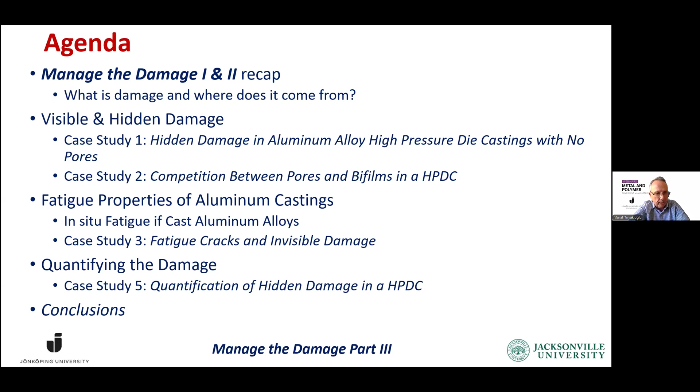There'll be two case studies in which we're going to show you results from our latest experiments. We'll talk about fatigue properties of aluminum castings. There will be a third case study, and then we're going to talk about quantifying the damage, which will be the fourth case study. Then we're going to finally wrap up with conclusions.

Quality assurance of castings traditionally has relied on detection of pores. The size and location of pores are usually specified in quality assurance specifications, for example on an X-ray, so that the inspectors can make accept-reject decisions. This is especially true in aerospace. The thinking is: if there are no pores, there are no problems with the casting. The casting is good, it's sound, there are no visible defects—and that's correct.

But unfortunately, the results of this have created a mindset, even an obsession with pores, that has taken us to adopt some technologies with, in my opinion, very low return on investment. I see that in the recent trend in the acquisition of expensive micro CT scanners. There was a time when we looked into hot isostatic pressing, and that has not paid off well. There's also, in my opinion, a wrong turn that has been taken by industry toward highly turbulent degassing and cleaning. There's a question mark right next to the cleaning technique that I see in the foundries I visit.

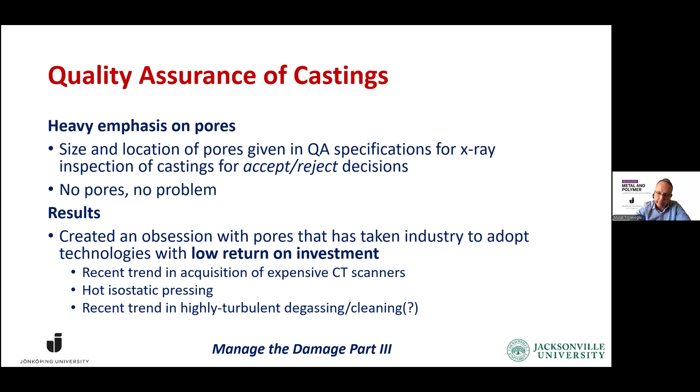We're going to focus on the damage in castings. So we're not talking now about quality, but the opposite of quality—where the damage comes from.

I took this picture where I live, on Jacksonville Beach, during one of my daily walks. It's a beautiful beach, you should come and visit if you haven't done so. What we see here is a substance we are all familiar with—water. We interact with this substance many, many times during the day: we drink it, we wash our hands, we wash our face, we take a shower, we cook with it. So in the end, we know how to deal with water.

And one thing that's important to remember about water is that the surface of water is covered with water.

The surface of liquid aluminum, on the other hand, is not covered by liquid aluminum. It's covered by a solid ceramic. And as long as this solid ceramic remains on the surface, it's harmless. But because we disrupt the surface so many times, that surface ceramic is incorporated or entrained into the bulk of the liquid, creating a non-bonded surface that we call a bifilm, because there are two films on each side. And that is the start of the damage.

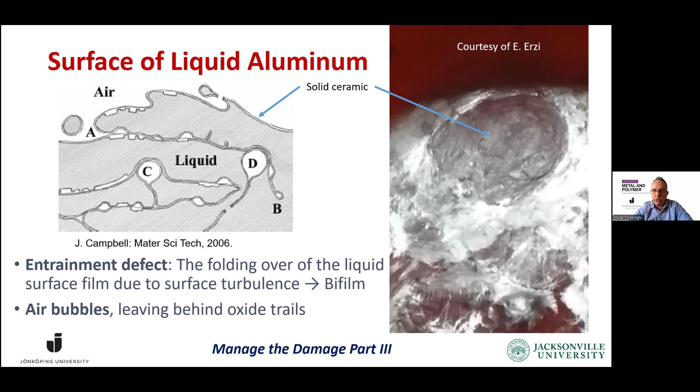So that is the root cause of the damage that comes back to haunt us eventually in our aluminum castings' performance.

When we don't like the temperature of our water, what we do is we put ice in it. There's no problem with it because the surface of ice is still covered with water. But if we put ingots in liquid aluminum, we again create damage, and the surface of the ingot is also covered by a thick alpha oxide. So we keep on giving damage to the liquid aluminum as we disrupt the surface. And that all comes from the fact that we treat liquid aluminum as if it were water.

So the result is bifilms in aluminum castings, and as you can see, several examples from the literature. It can be quite a huge bifilm like this, and you can see one half of the film on this shiny surface, while the other half was removed during grinding and polishing. Here's an extensive bifilm, and if you zoom in, you can see that this is an unbonded surface. It's basically a crack that is in our casting.

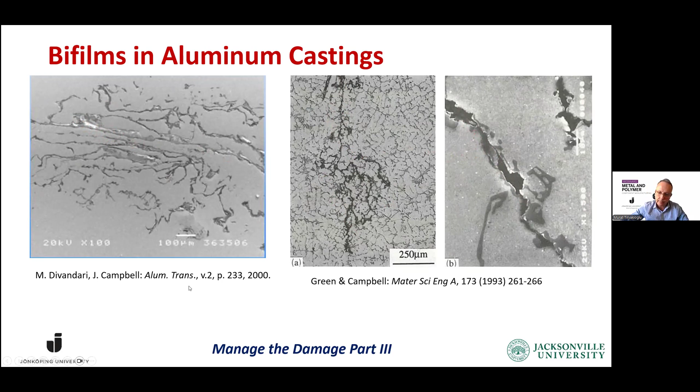So what is the current technology? This is a YouTube video that I found online, and I'm going to show you a small snippet of it.

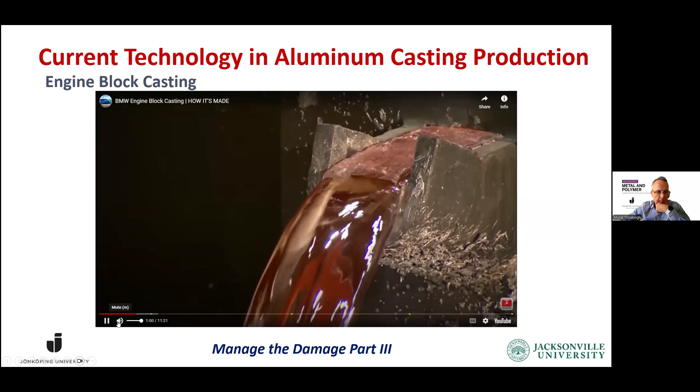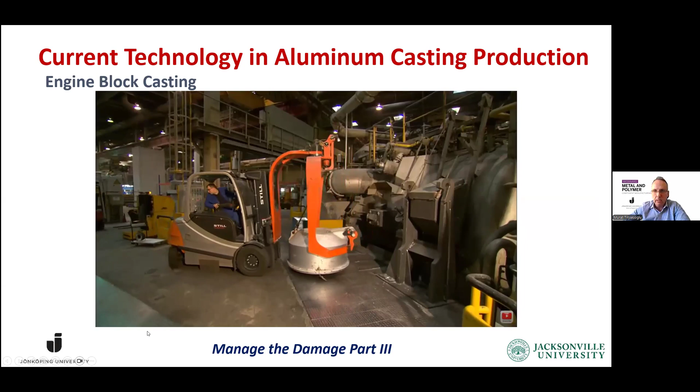So we have a central furnace. And when the metal is ready, that metal has to be transported from the central furnace to the other furnace where the castings are produced. For that, we need a ladle, a transport ladle, and that's taken away by this forklift. So there has been one melt transfer, and now it's brought to the holding furnace, and it's dropped from a height of, looks like several meters. Please notice the area, the top of the liquid metal.

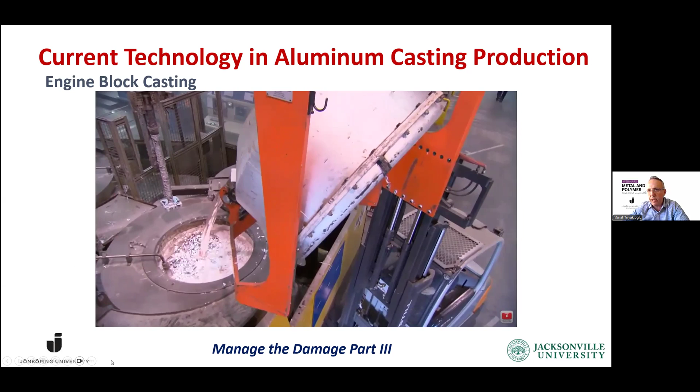As you see, it's quite turbulent, and a lot of air has been entrained, a lot of surface covered by an oxide. So this is a perfect way to damage melts. And this all comes from our design of the production system. If we have a central furnace that requires not one, but two melt transfers, so every time we do a melt transfer, we seriously damage our metal.

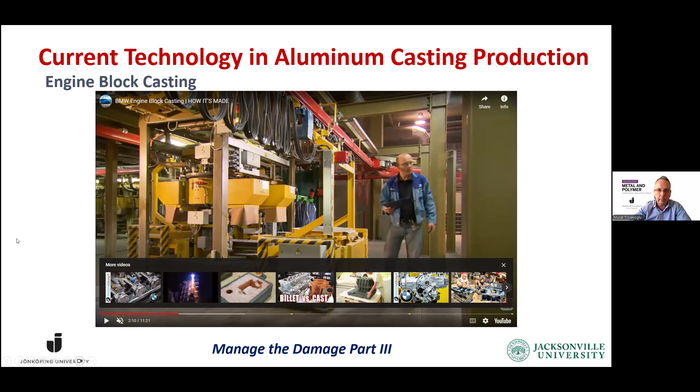So what we saw here in this video, we use buckets. We use buckets in our aluminum production system. We love it so much that we pour from one bucket to the other. And again, in our mind, there's nothing wrong with it. It's liquid, it's just like water, but it's not water. And that mindset has to change.

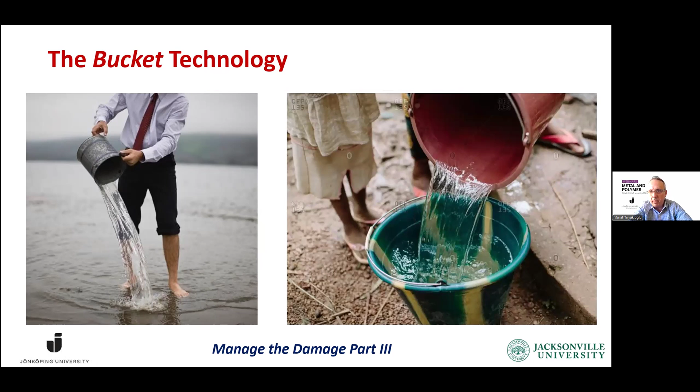We saw how this melt transfer, when it went in, there was a turbulent reaction in the ladle, in the crucible, below in the holding furnace. And that's called a plunging jet. When you drop a jet from a height, it goes into another liquid. It's known as a plunging jet.

It's a great way to entrain air into the liquid. It's well known as a fantastic technique to create a liquid and air mixture. Well, we don't want air in our aluminum castings and liquid aluminum, because that air is going to leave a trail, and in this case, it's going to be a bubble trail. I'm going to show you a picture of that.

But when we have this melt transfer, you can see that in the beginning, there's 65% air in where the liquid is supposed to be, and that gradually decreases, but we are giving serious damage to the liquid aluminum in these melt transfers. And the bubbles and the air that's entrained has buoyancy.

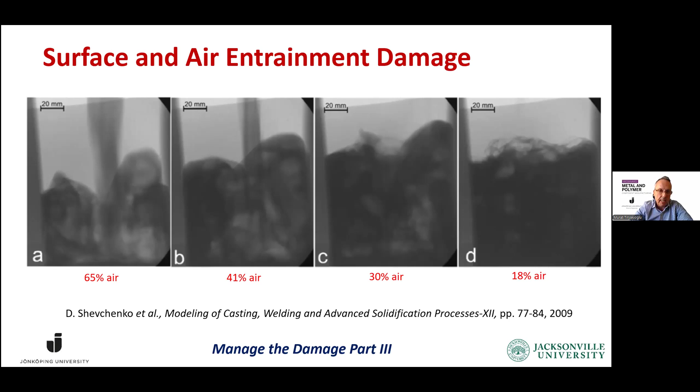It needs to go up. And you can see here a bubble that tries to go to the surface, leaving behind a trail, an oxide trail. That's going to act as a crack when it's under stress or tension. And you can see the bubble here that has had to stop because of the impinging solidification in front of it. It could never go to the surface.

So the second technology we have, and sometimes this is required by the customers, and which is mind-boggling to me, is this cleaning process. And if I put some question marks, let's watch this video.

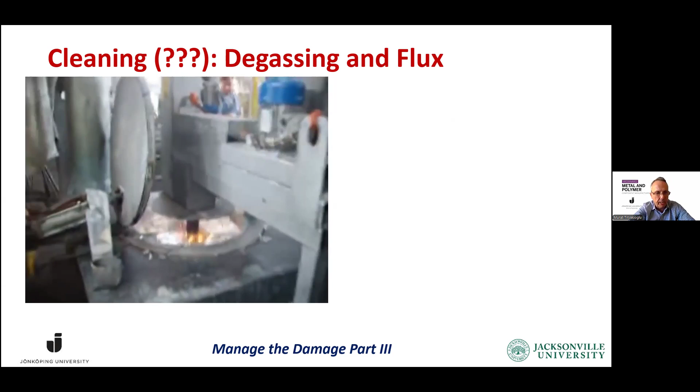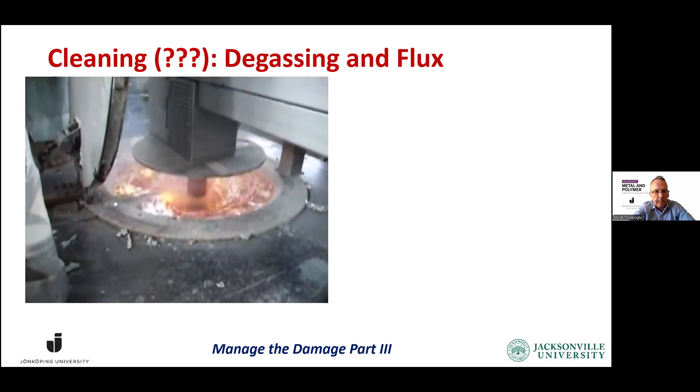This is wildly turbulent cleaning, and some flux is put on the surface. The surface oxide is entrained into the bulk of the liquid along with this flux. The results are usually okay. I think this is enough.

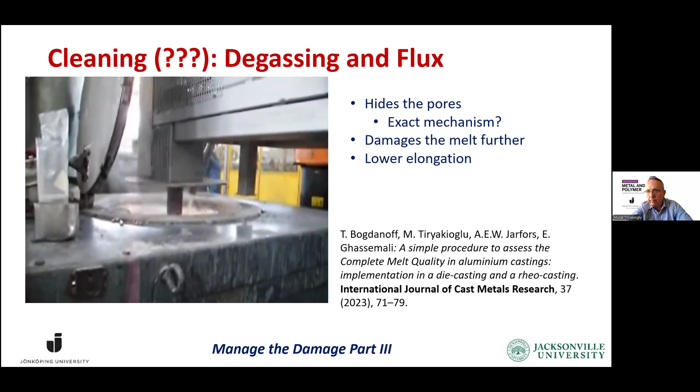It's an excellent way to hide the pores, and it's been designed to hide the pores. At this point, we don't know the exact mechanism of how it hides the pores, but it does. But one thing we have found out is that it damages the melt further, and it gives much lower elongation, which we reported in our recent paper that you can read if you want to, because we followed the damage in 2 foundries and found that it's consistent after this operation. Yes, the pores are eliminated, but the metal is much less ductile.

So another technique that we use is the reduced pressure test. If we were to have a thought experiment and plot hydrogen content versus the density of the sample, our thinking is that if it's highly damaged, there is going to be a strong correlation between the hydrogen content and the density of the RPT specimen. With decreasing damage, that correlation will be less strong. And when there's no damage, regardless of the hydrogen content, there would be no pores in our RPT samples.

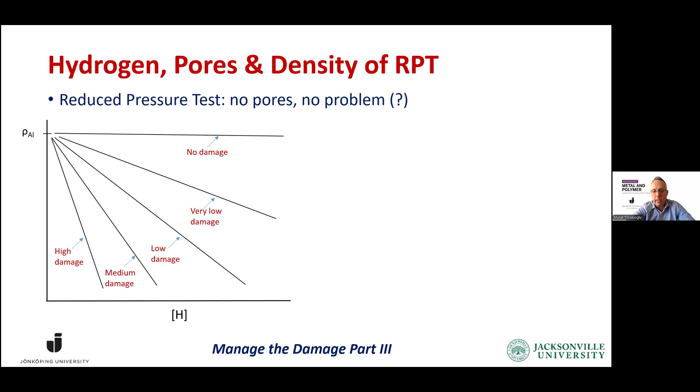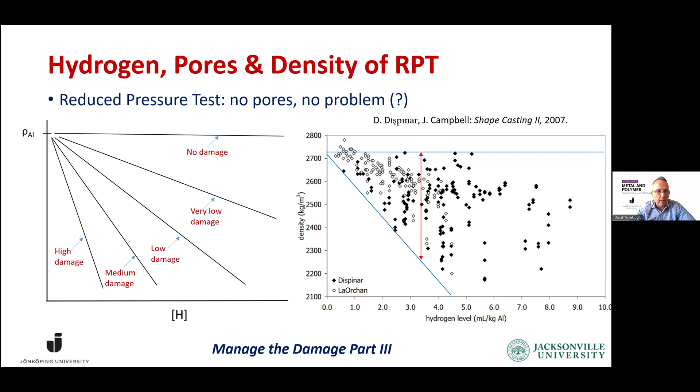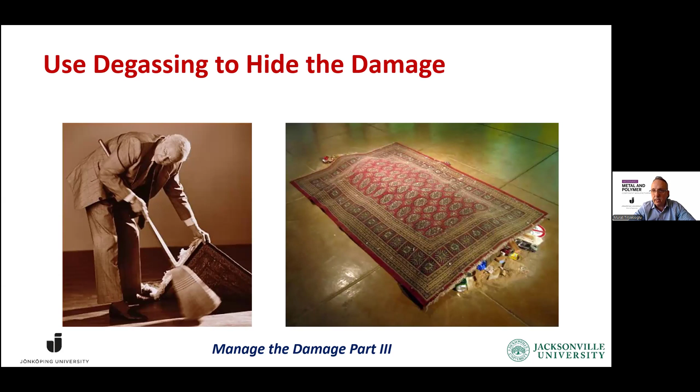We can tell whether we have damaged melt or not, but by reducing the hydrogen content, we're basically shutting off that information. So what that does is we're using degassing to hide the damage. We're sweeping the dirt under the rug, and if it's under the rug, it doesn't exist. If I don't see it, it's not there. Unfortunately, life is not that simple, because they come back and present themselves when the casting is underperforming, under stress.

So this occurred to us some time ago, and I want to give you an example of the origin of our thinking. We were measuring the entrainment damage, both surface and air. We started with a very good metal, continuous cast A356 with very low pre-existing damage. We measured that, and we were looking at our RPT specimen.

Of course, the first thing that you see is this large pore. That's good, because we were looking for pores. But then this curious feature that you may see here attracted my attention, and I asked, well, what is that? And when we turned the X-ray mapping on, you can see that this is for oxygen. This is clearly a folded oxide hiding between the dendrites near the pore.

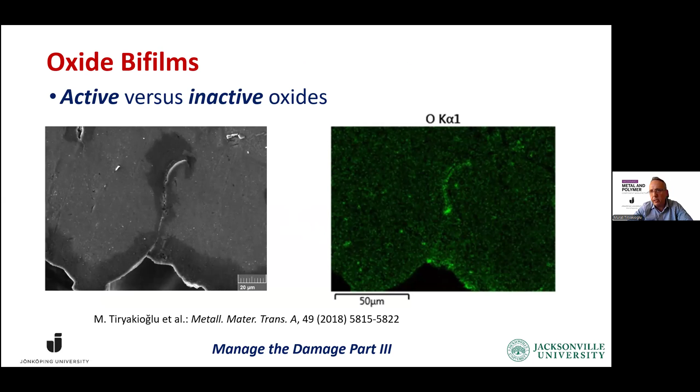And then we started looking for these hidden bifilms. We went to another location on the same micrograph. Like this, it looked curious. Okay, turn the X-ray map on, and they are everywhere. As you can see, there's some here, there's some there, there's another one here, there's another one there. So all these bifilms hiding right in front of us.

There's a huge pore, but the pore did not expose all the bifilms. So it's clear that the overall damage is more extensive than what we can see with the pores. And that started our thinking: well, okay, if that's the case, if we get rid of the pores, do we get rid of the damage? And obviously the answer is no.

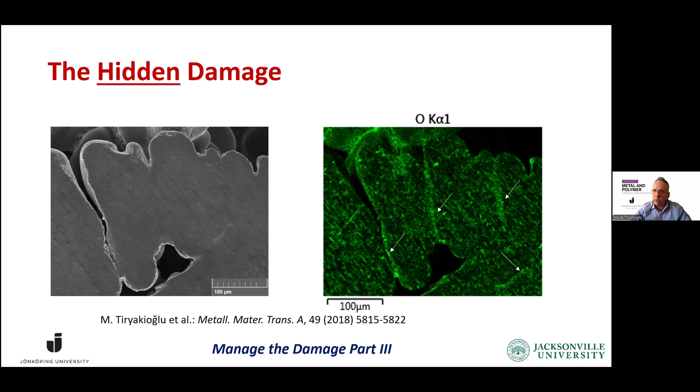So we quickly realized that we're talking about the tip of the iceberg. The pores are only the tip, and the total damage is more extensive than can be measured from RPT or any kind of quality assurance test. In fact, quality assurance practices that rely only on the detection of pores clearly ignore the majority of the damage.

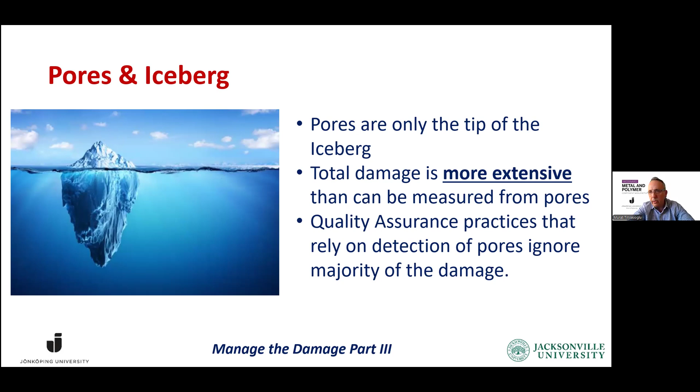So from then on, I started looking in the literature. Then we started looking at some experimental results that we're going to show.

But there is always an oxide next to a pore. And in fact, calculations show us that it's impossible to nucleate a pore, either homogeneously or heterogeneously, in liquid aluminum. So the only mechanism available for a pore to form is a pre-existing surface, and that pre-existing surface is the bifilm. So anytime we have a pore, there is a bifilm right next to it that remains unopened.

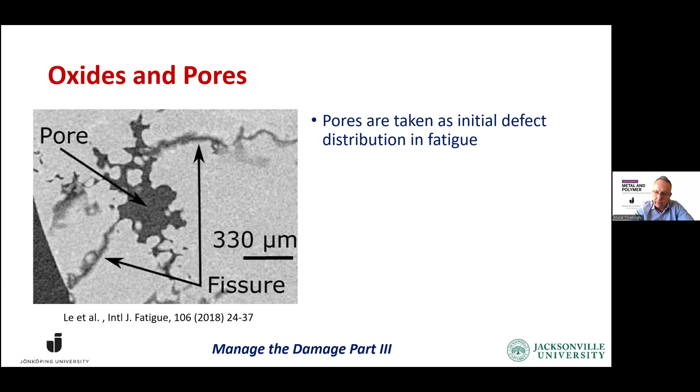And here you see something I found from the fatigue literature. It's referred to as fissure, but it's a bifilm. And now just looking at pores as the initial defect distribution in fatigue, which is a mistake I have done myself, is misguided.

We can now understand why cracks were observed to start propagating from pores on the first cycle in fatigue tests, because there's a crack right next to it, a pre-existing crack.

So how can we see this overall damage? The only thing that damage cannot hide from is a tensile stress.

So here's an in situ test from the literature again. Here's a pore, and at the lowest, when tensile stress is applied, all these cracks start to form around the pore. And they are not really forming, they are just opening up. And these are the bifilms that were there to begin with.

And from the same paper, you can clearly see, okay, there's something there, the crack, and that crack is a bifilm. It's associated with intermetallics and a pore. And when you apply a tensile stress, there's no resistance to it. It presents itself, it becomes visible.

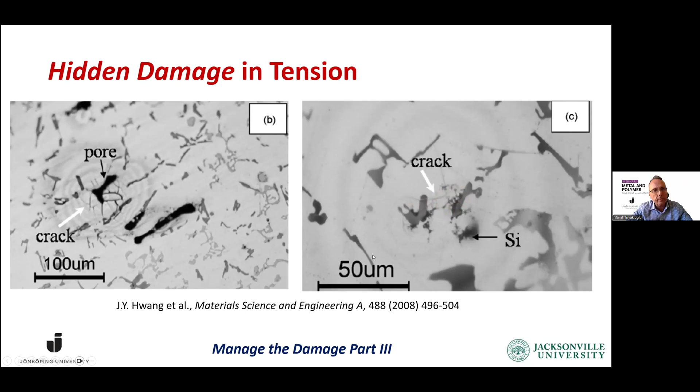So the important concepts about damage are: pores are only the visible part of the overall damage. The real damage is much, much more extensive.

Closing the pores, we demonstrated that it's a very low return on investment. And there are several examples on the first seminar, and I think you have access to those videos if you choose to watch them.

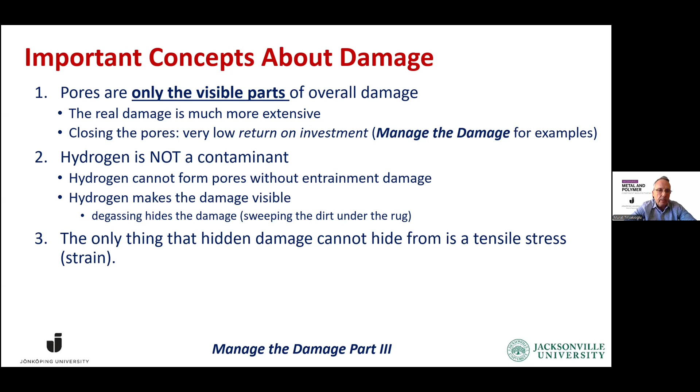Hydrogen is not a contaminant. Hydrogen cannot form pores if there is no pre-existing damage. All hydrogen does is make the damage visible. So degassing hides the damage, sweeping the dirt under the rug. And the only thing that the hidden damage cannot hide from is a tensile stress or strain.

This brings us to case study number 1. Jakob?

Yep. So then we will take a look at this case study where we are taking a look at this hidden damage in an aluminium alloy.

So what we will be looking at is a high pressure die cast material where we have now done X-ray to confirm that there are no visible pores in this material. So if you go to the next slide and start moving forward, we can see the shape of the specimen. It's a high pressure die cast aluminium alloy specimen, as I said.

You see the shape is not as we usually use in tensile testing. It's not a pure dog bone specimen. Instead, these are samples that were actually originally intended for bending fatigue testing.

But we had an idea to test this in tension because we were looking at using a technique called virtual fields method to develop a constitutive model that describes the elastoplastic behavior of this material, capturing a larger variation of stresses than just purely tension load.

But we tested this. If you test this in tension, you will create an uneven strain field. And as we said, there is no visible damage in these samples. So all damage that we see is, as Murat introduced here, hidden damage.

So you can see the strain field in the picture here. That's what we would expect to see in a tensile sample when we apply a tensile load to this sample.

So what we did is we use digital image correlation. We put two cameras to observe a pattern that we paint on these samples, so we can observe in situ the strain distribution and how it proceeds when we increase the load.

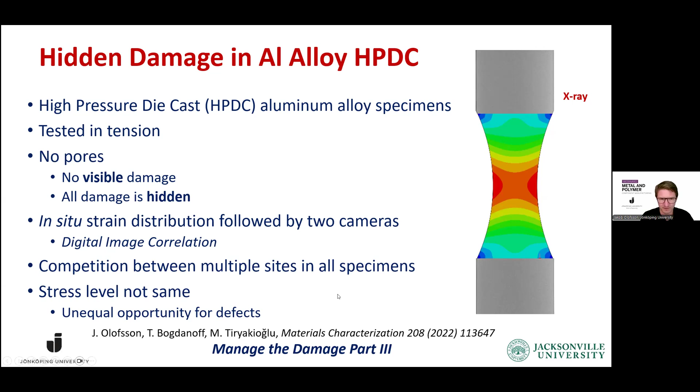And as I said, the stress level is not the same throughout this. So we have an uneven loading of the material, which also creates an unequal opportunity for defects. So as we will see here in the slides, there will be a competition between multiple sites.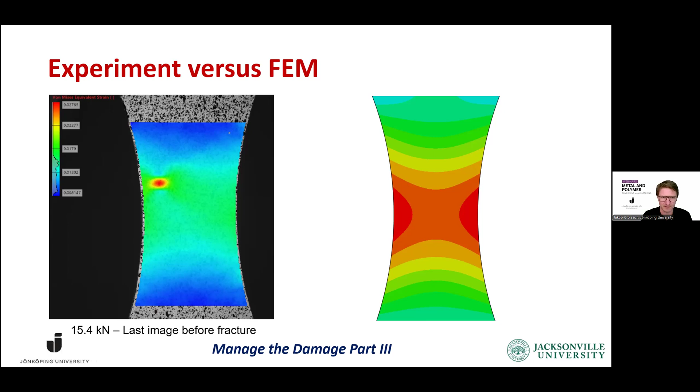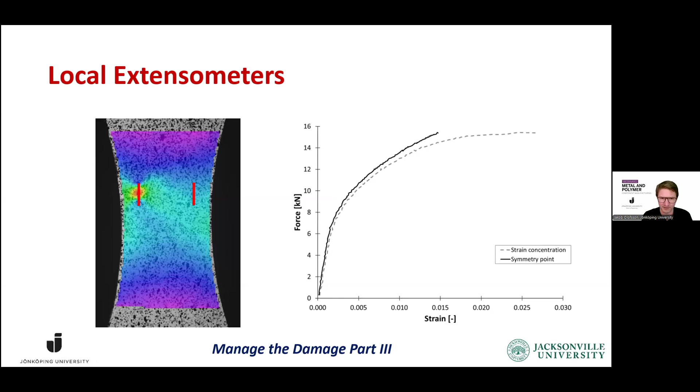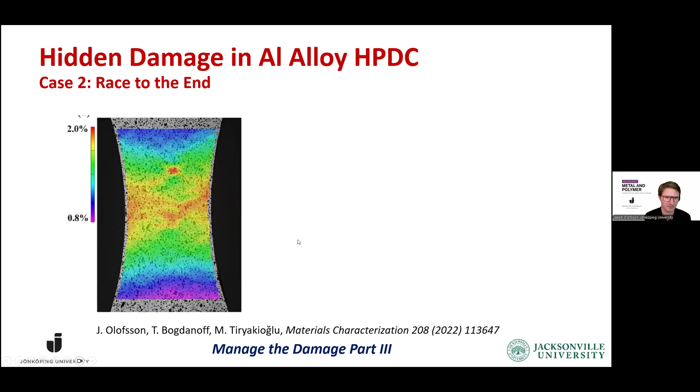The second case we see is where the hidden damage is really fighting and competing all the way to the end. At low load, it's not as nice as you would see from the FEM simulation. There's something going on in the center here - two areas that are really competing with the geometrical effect we have.

A bit higher up, you can see a clear red spot, which is also causing high strain locally in the material. We see that as the fracture proceeds through this thinnest area, it follows these red indications that were also seen in the strain field at low load. This is clearly the winner, and we had something at the top that comes in second place in determining where the fracture occurs.

Investigating this fracture surface closer in the SEM, we also see a very small pore, but also an associated oxide, which caused it. Where you see this dimple that goes down in the fracture cross section, we see that there are two oxides competing, which has caused this branching of the crack during the fracture.

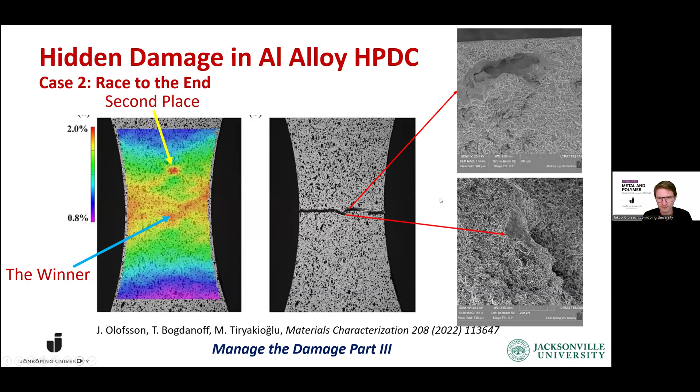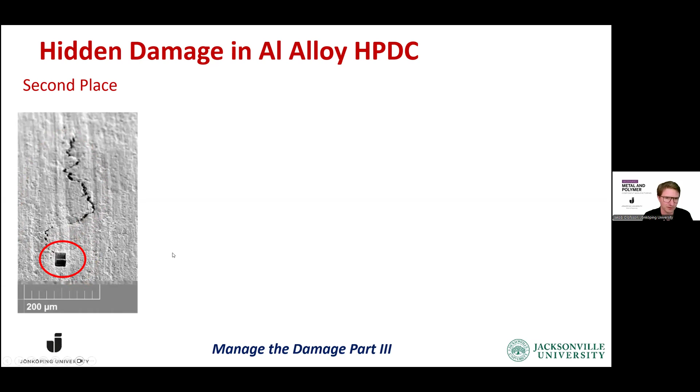If we look at the second place position, we could already see in the paint on the DIC samples that there was a crack forming. When we remove the paint, you can see in the SEM picture that there's a big crack, and we can use focused ion beam technology to make a small cutout from the front tip of this crack. It's a very small sample - you see the scale down there, it's 10 micrometers - that we can lift up and do a STEM EDS map of the chemical composition to see what we have here.

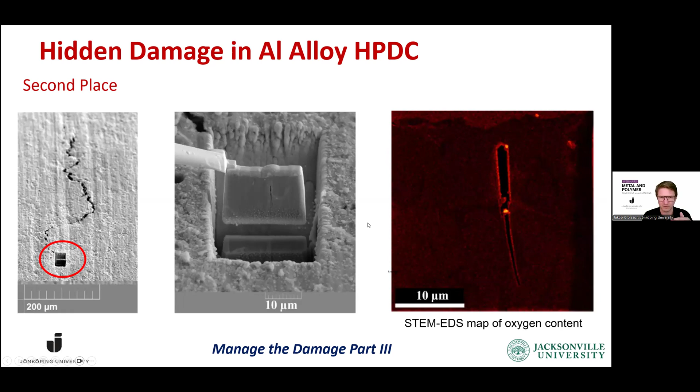Looking at the map of the oxygen content, we can see that this is clearly an oxide that has also been causing this crack, which ends up in second place. So it didn't cause the fracture, but it still caused a crack. There was competition between this crack, which is actually much higher up on the sample, so it's not subjected to the same load as the central area, but still the material has been cracking here.

So we said that these were samples that were also X-rayed, where we could confirm that there was no visible porosity in the samples. But at the same time as we produced those samples, we also played around with the settings so that we also got some samples where we had forced pores within the samples. So we're going to take a look at them also. This is work that we are just publishing together with Murat here.

The difference now from what we saw before is that we now also have the pores. So on top of the hidden damage, we also have the visible damage. And as you remember from before, these pores cannot have formed without these bifilms. The effect they cause is an additional stress concentration that adds on top of what you already have due to the hidden damage. So you kind of inflate the problem here.

So in a competition, we will see that pores have an advantage over the hidden bifilms, which are smaller and less inflated compared to the pores, which have now inflated the bifilms.

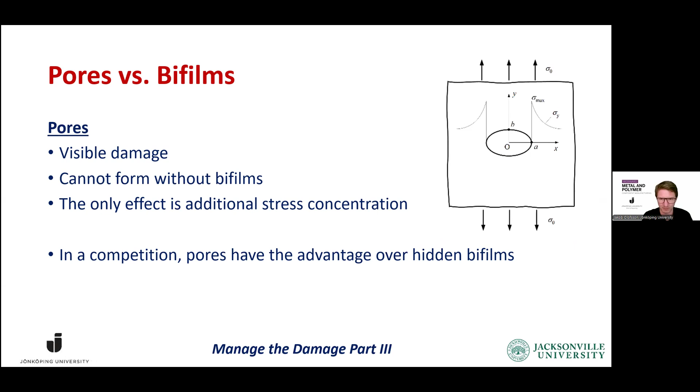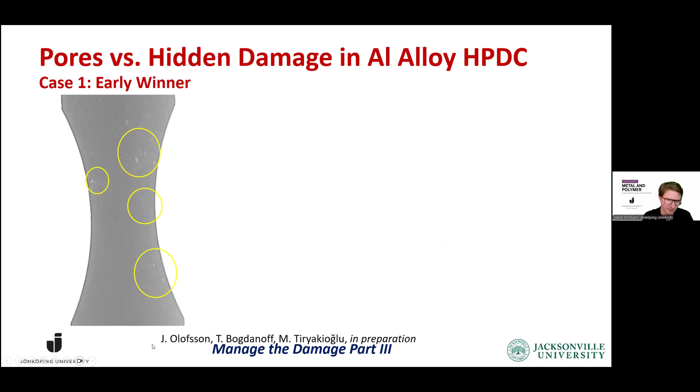So again, we have case 1 here, which we call an early winner. You can see from this X-ray sample that we have several pores within this sample.

So proceeding and pulling this to the fracture in the next slide, here we can see what we can then see in the microstructure on the fracture surface.

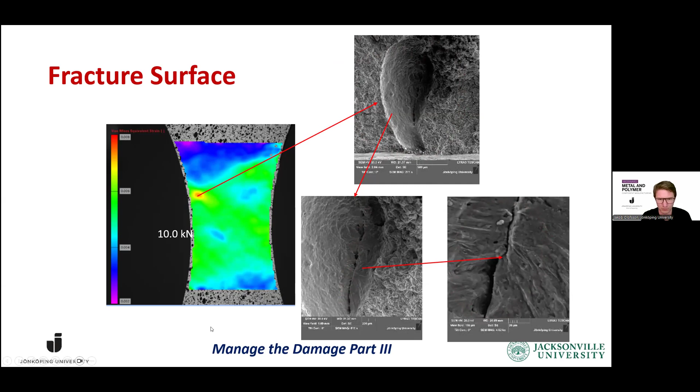There are multiple points where we can see this, and on the top region here, when we zoom in, you see the oxide quite clearly. As we increase the magnification in the SEM, we can see that the oxide is really draping the microstructure, both the dendrites and the intermetallic phases that you see in the microstructure here.

Also in the center, we see that there's kind of an oxide which is also extending into the material perpendicular to the fracture propagation which has taken place.

The next case, you can see again that there is a competition between different defects here. You see in the X-ray picture on the left side that there is a clear big porosity, but there are also other effects going on when we look at the strain field.

We can see on the left side there's a bit of this geometrical effect that we would expect, but on the right there is clearly something else happening here. And as we increase the load, that seems to be the winner, in the central area here, where there's clearly something causing a high strain.

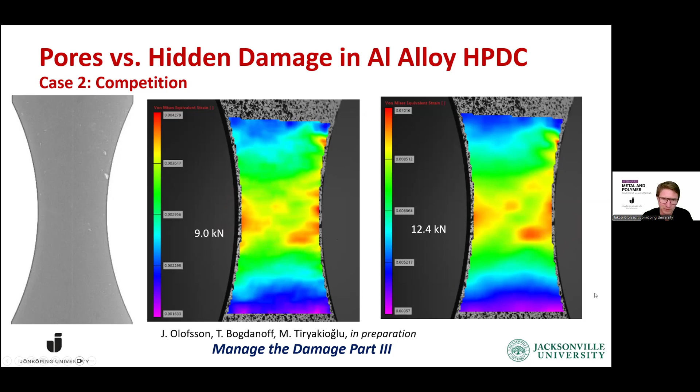But when we proceed to the fracture, it does not happen where we see the highest strain, because it actually goes higher up. There you can see we have this indication of porosity also from the X-ray, but as you can see on the SEM picture to the right, the pore was actually on the other side, which we were not looking at directly. So we didn't see the high strain concentration on our side, but we could see the effect of it. It didn't look as bad as the other ones that we saw on the front.

So this was kind of an unexpected site where it happened, if we judge from the strain field. But remember, this is also at a lower load than the central area is being subjected to at the same time.

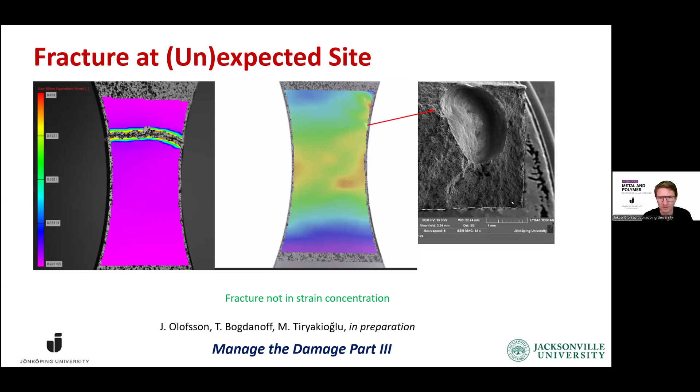We also can see, in second place, a site that didn't cause failure but had a high strain concentration. We can see cracks on the surface, visible already in the paint. As we saw before, this also means we have oxides at these places. To the right there's a combination of visible damage and what was seen in the X-ray, but also the extending hidden damage, which clearly separated and caused these cracks to appear, but didn't win the race to failure.

Yeah, with that, I think I hand over to Murat again, or is it Tony's turn? It's Murat first, yeah, I think. Yeah, it's my turn. Thank you, Jakob.

So fatigue failure, as we learn in metallurgy or mechanical engineering books, we've all been taught that a crack initiates somewhere. It can be from a design flaw, a defect, or some sort of stress concentration. Then the crack becomes a long crack, and the long single crack propagates in solid, defect-free material. That has been the thinking. One single crack propagates until final fracture occurs at the critical crack length. That's what we've all been taught.

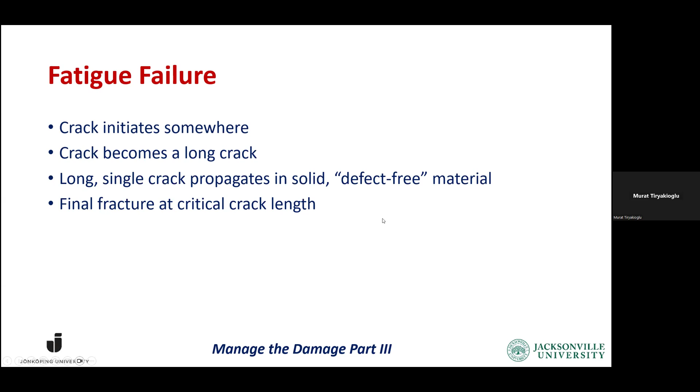With the emergence of new technology showing us in situ testing, all of this thinking is now being challenged. So I'm going to show you a few examples from the literature before turning it over to Tony - these inactive oxides, or the hidden damage, during in situ fatigue testing.

Here's an example of 319 alloy. We're looking at two pores, one on the right-hand side and another one here, at the 10th fatigue cycle. By the strain fields, you can see that there's a field between them, and something opened up almost at the midpoint between the two pores.

At the 30th cycle, you can see one crack that already started propagating, but there are also multiple cracks opening up, and they started to propagate as well in the direction that's much advantageous for them to release energy.

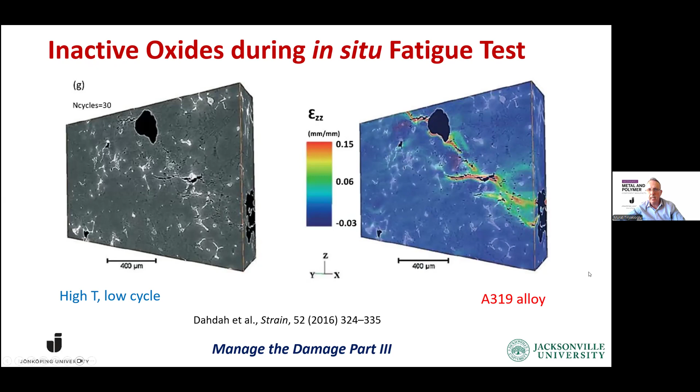If you look at the strain field at the 30th cycle, you can see a crack that has already started propagating from this pore. There's another one going inside, a third one that propagated here, and many other cracks that have started propagating. Obviously, in the end, you can see that those cracks will all join together to form one large crack.

So that's different from the crack propagation that we've been taught. These are all small cracks that opened up and finally joined forces to form the long crack. So it's all small cracks, not a big long crack that got initiated from a single point. There are multiple crack-initiating sites. Obviously, these are bifilms.

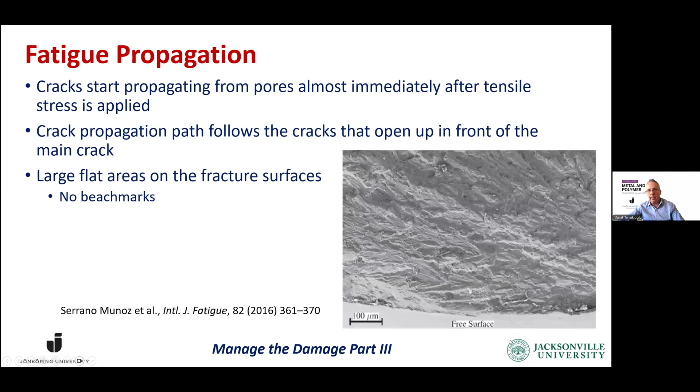These start immediately with almost no threshold, and that's obviously small crack propagation. The crack propagation follows the cracks that open up in front of the main crack. So small cracks join forces to become the main crack. There are also large flat areas on the fracture surfaces without any beach marks reported, like this one - a clear indication of a bifilm.

This brings us to case study number 3. Tony? Yes, thank you so much. Now I will present a little bit of the work that we have been doing over the last years.

Trying to actually show how the hidden damage will be revealed in fatigue crack propagation, we have done a lot of experiments in the in situ cyclic testing we have at Jönköping University, where we can produce small CT samples that we put inside our SEM. From this, we can get a lot of information.

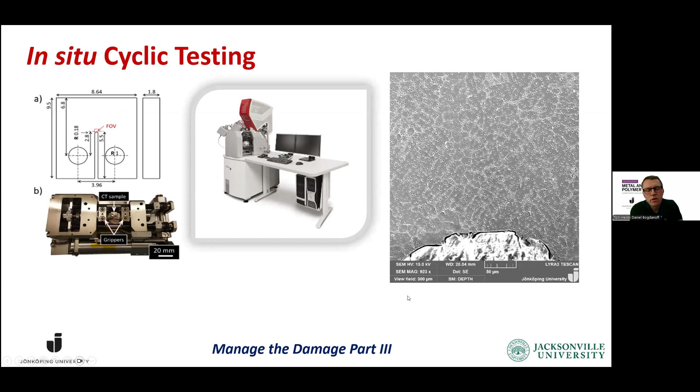So here we actually see what we see in the SEM. We look at a view of 300 by 300 microns when we do the test, and we can get the data out in terms of grain size using EBSD. We can also apply, so we can see when the crack is propagating during the test, and here we can see some interesting features in front, applying digital image correlation that Jakob was presenting before.

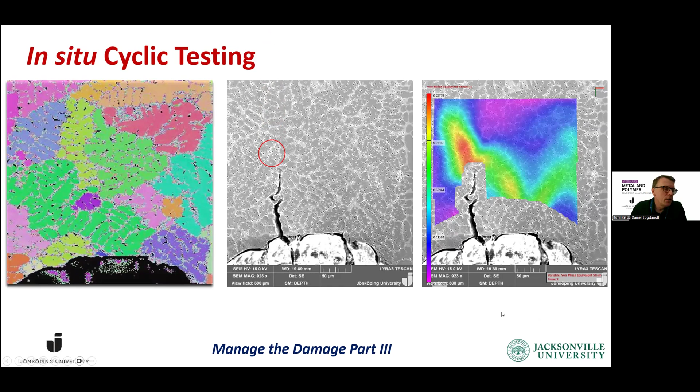We can actually see that we have a strain concentration where something is happening before. One of the best advantages is that we can follow it live while the test is running. Here we can see the crack propagation forming during the test. What we see is that we have crack propagation to the top left, but we also see a secondary crack appearing in the center, and a lot more cracks in front of the propagating crack.

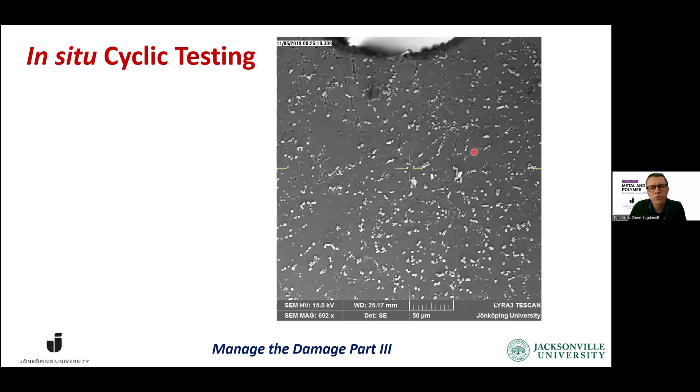So if we continue, we did this on different materials. The first material we started with was a 42100 alloy that we HIPed. Here we're starting to see this interesting behavior, that we have actually a big crack in front of the propagating crack. It has not even started the crack propagation, but in an area like 200 microns away, we see this big crack opening up. And if we continue, this crack will be the final failure in the end.

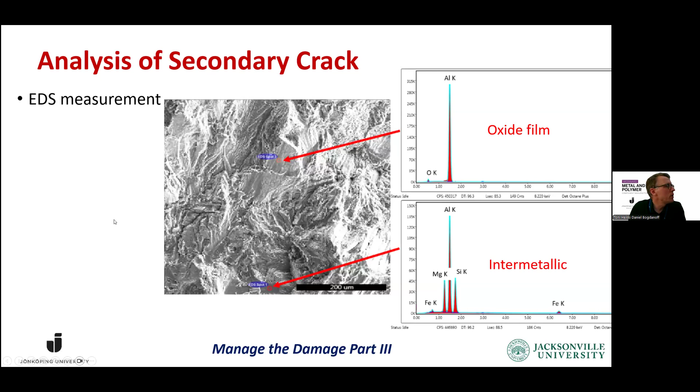So here we see that we have new crack initiation spots that will coalesce with others, and that will be the fatigue. We confirmed that this was an oxide film in this crack propagation area by using EDS on the surface, in this paper that we worked with. I will show you a little bit further, more data about this, what we see.

Continuing to this one, we actually show how much hidden damage we have in the material when we look at this. We saw here between 900 and 1,000 cycles that we have a lot of small cracks opening up. Since we have our SEM and focused ion beam, we can actually investigate what is happening in front of the propagating crack.

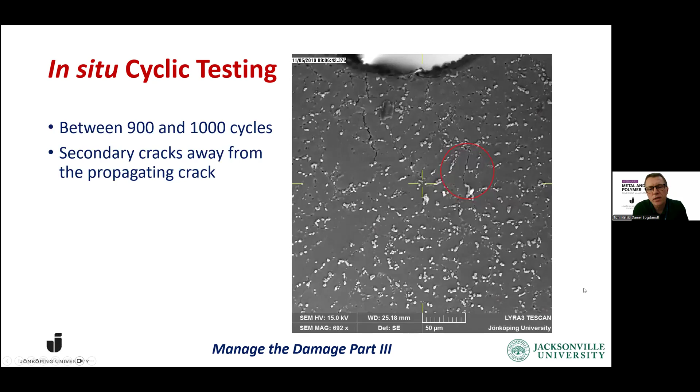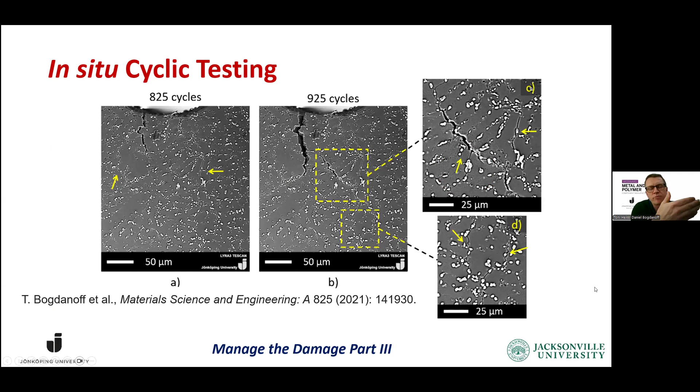So we decided to dig into this further in this paper that we published. If you take the next slide, we decided to take one area in front of the propagating crack and see how the material looks in front of the propagating area.

So we decided to interrupt the test that we see in figure D here. Then we used focused ion beam milling to take out the area in front, so we could create a 3-dimensional volume. Then using software, we can highlight all the cracks in the material with red color and all the intermetallics in blue. This is an area of 250 slices, so we can see what is happening.

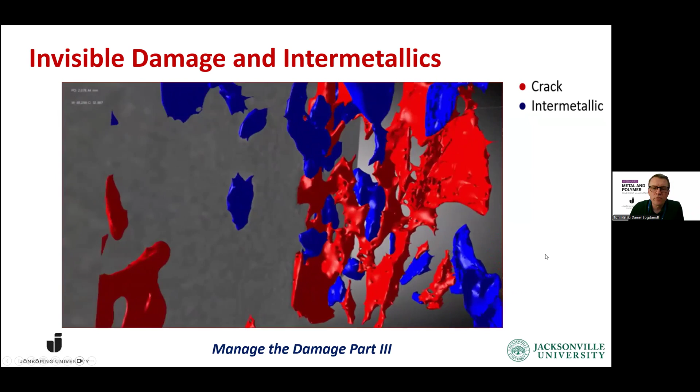So if we go to the video in the next slide, what we see on the left side is the propagating crack front. As it starts to slice through, it will add all the cracks. What we observed is that we have a lot of small secondary cracks everywhere in front, and they are not directly linked to the intermetallic phases in this case. This is clear evidence that we have a lot of small bifilms opening up like cracks that will assist the propagating crack front and coalesce with the previous crack. So we have a lot of small cracks competing for the fatigue failure.

Then I leave it to you again, Murat. Thank you, Dani.

So how do we quantify the damage? Obviously, based on our discussion, X-rays are not the most helpful. CT scan will probably give you the same results. But we said that damage cannot hide from a tensile stress, so let's build on that.

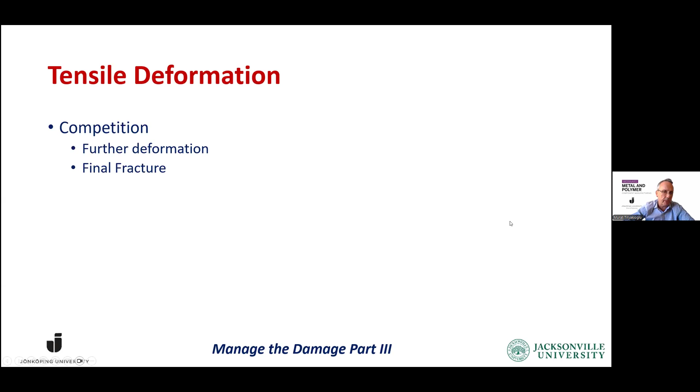So, essentials of tensile deformation: it's always a competition between further deformation and final fracture. At any point, any stress-strain combination during deformation, the lowest energy option is taken. If it takes lower energy for further deformation, the material deforms, whereas if the energy is lower for final fracture, the fracture takes place.

So ductility is a direct measure of the energy absorbed during deformation. That brings us to the last point: elongation, which is a great measure of the energy absorbed during a tensile test, is a measure of total damage.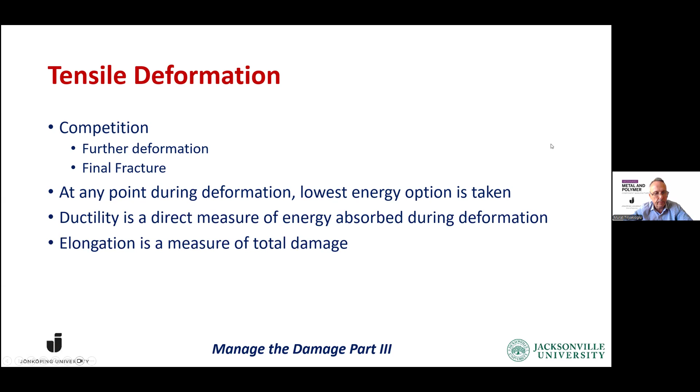Taking that, some years ago, working with Professor Campbell and a colleague of mine from Greece, we looked into the aerospace and premium casting literature. We put all the data we could find on a scatter plot with yield strength on the x-axis and elongation on the y-axis. When we focus on the maximum numbers, you can see that there's a trend.

We call this the ductility potential. For aluminum silicon castings, we can write this ductility potential as 36 minus 0.064 times yield strength, in megapascals, and this will give you a percentage. So at any given yield strength value, you can calculate a ductility potential of that alloy.

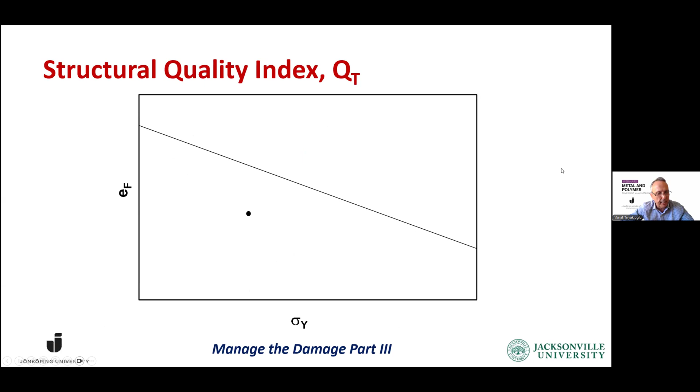This brings us to the structural quality index. Now that we have a metric to compare to, we can have a quality index, QT, whereas this is our data point that comes from our tensile test. It has a given yield strength and an elongation.

And if I can calculate a value from the previous equation—similar equations exist for aluminum copper alloys if you're interested—then I can define the quality index as the elongation obtained divided by the ductility potential. So what is the measure of damage then? Damage is the part that I'm not getting from my casting, and that's the loss due to damage.

Our thinking is that there are 5 different distinct areas. If your quality index comes out to be 25% or less, your castings are highly damaged. Between 25% and 50%, you have moderate damage. 50 to 70%, you have low damage. After 70%, they start to neck—that's very uncommon in cast aluminum alloys, but that brings you to the very low damage category.

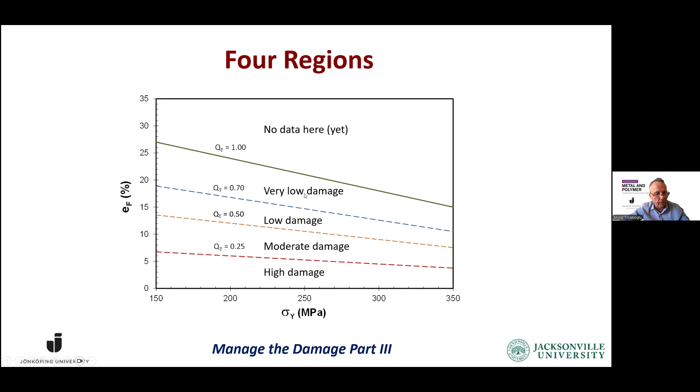And the last area is where we don't have any data yet, but we hope that with improving quality of our melt, we will get more, and this ductility potential will shift even further up.

Having said that, that brings us to case study number 4. Jakob?

Yep. So this next case study that we've recently been working with, and is just in the pipeline of publishing right now, is an example where we're looking at the quantification of hidden damage in a high-pressure die-cast component. So now we're taking it from tensile bars into a component. This is work we've been doing together with MAGMA Giessereitechnologie in Aachen, and it's been a collaboration in this project.

So what we're looking at is a high pressure die casting, as you can see schematically here on the picture. In order to evaluate the local material properties and see how it varies throughout the casting, we have done tensile testing on several different locations of this casting. You can see they are labeled here A, B, C, D, E, F, G.

For each location, we have been taking 20 specimens that we have been evaluating, doing tensile tests of. They have been tested in tension. The yield strength of this material is around 145 megapascals. So as Murat just mentioned, the ductility potential for this material would be around 27%, I think was the value.

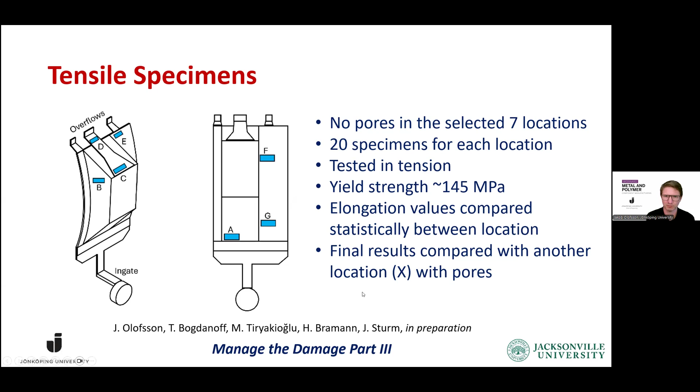The final results that come out of this, we also compare to another location where we have visible porosity—because I forgot to mention that in these 7 positions we're looking at here, it has been confirmed that there are no pores. It's been CT scanned to make sure there is no visible damage in these locations.

So first, we're taking a look at how to compare the different positions. The initial idea was, let's take samples and look at the average value. That's typically what we do when you do tensile tests. And you think, okay, there's a slight change in the average values, and why can that be? And you try to explain that.

When you start talking about elongation, you have to understand the physics behind this - it's a weakest link problem, so it follows a distribution. It's not one specific value you end up with. So in order to compare, if these positions come from different statistical distributions, we apply statistical tests of the data sets from each position.

The idea with this test is not to compare the average values we're looking at here. It's called a Mann-Whitney test, where you compare the distributions and see if they can be expected to be from the same distribution, or if there's a statistically significant effect that they're from different distributions. So what we're looking at in the table is the p-value from this test, and if that's below 0.05, the distributions are different.

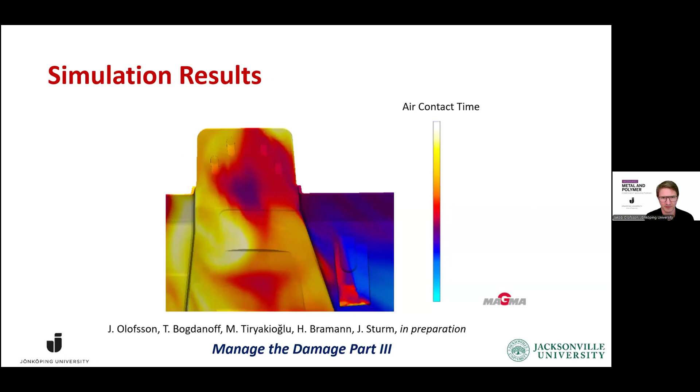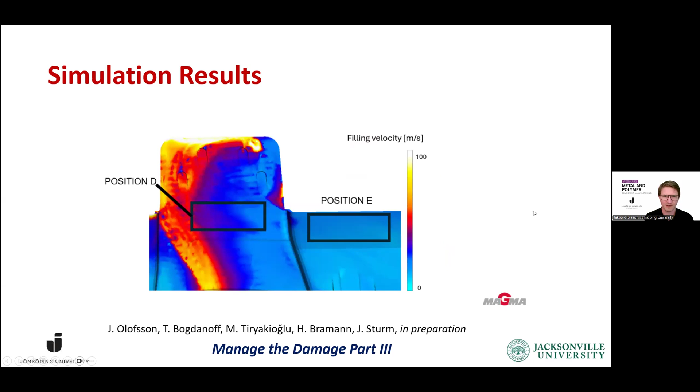Geometrically, they are very close. Also looking at the velocity these positions were subjected to, we see that position D had significantly higher velocity during filling, so there's been much more turbulent flow of the melt coming up here. That could be a possible explanation for why D is different.

We then also took samples from these positions and again applied digital image correlation. The 2 samples on your left side are now from position D, the location that stood out as different, while the 2 on the right are from the area that's actually the best, just next to the really bad position - so it has really good properties.

You're looking now at the strain field when all samples are subjected to the same level of deformation, corresponding to around 0.4% total strain - so we're around the yield point of the material.

Interesting is that the 2 samples on the left, suspected to contain much more oxide, show a much more dispersed strain field. You can see small histograms in the scale bars, and especially for sample D2, the strain distribution is very dispersed - there's big variability of the strain because we have this large amount of hidden damage, which causes a lot of strain concentration. So there's a competition between all these internal damages.

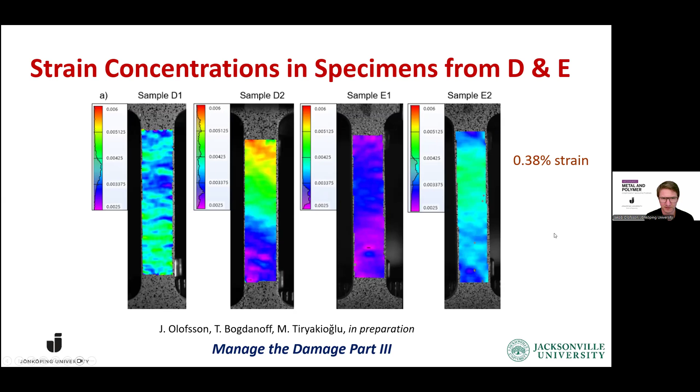So that really explains why this position D comes out as different. And if we proceed to the next slide, what we can do then is we know that the elongation values here are expected to follow a statistical distribution.

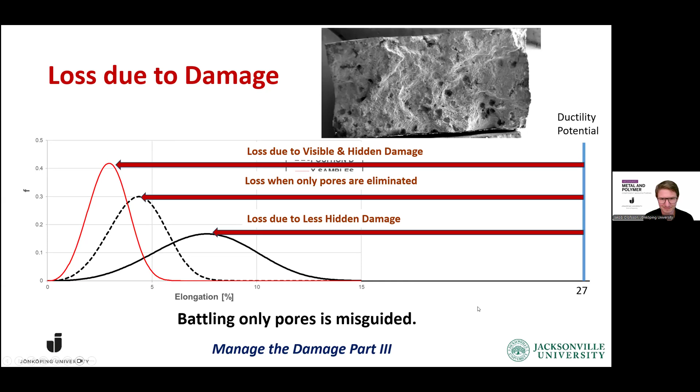So battling only the pores, as we see it, is kind of misguided. So, Murat, I think I leave it to you to wrap up the conclusions here.

Yes, thank you, Jakob. So in conclusion, we can all appreciate that pores are only the visible part of the damage. The total damage is mostly hidden and much, much more extensive. I think we've clearly shown that. We made that case very strongly. Many bifilms hide in castings. They remain unopened and undetected during quality assurance checks, especially if you rely on X-rays or CT scans. You cannot see them.

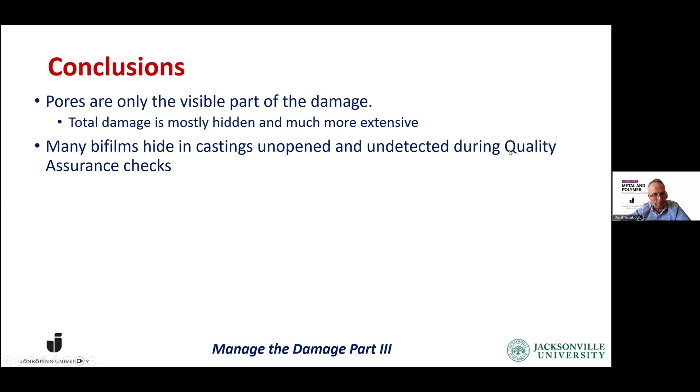One thing they cannot hide from is tensile stress. They open up during tensile tests and fatigue testing. Upon tensile stress, there is a competition between multiple bifilms to cause the final fracture. All pores have bifilms around them, which also open up during tensile stress. What pores do is act as stress concentrators, so the bifilms next to them have a larger chance of winning the competition to the final fracture.

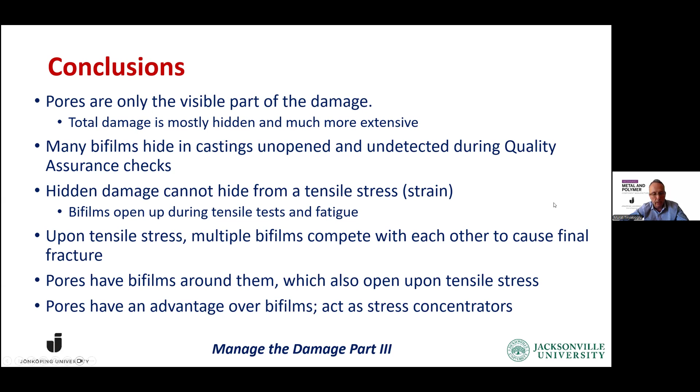The fatigue of cast aluminum components is dominated by damage. The cracks initiate early from pores or hidden damage. The crack propagation that we were taught in school does not apply in this case. It's mainly linking of simultaneously growing cracks from bifilms. There is no long crack growth. It's all small cracks.

So at this time, being a certified quality engineer, I can easily say that the quality assurance practices built on detecting only pores are outdated and misguided. Battling pores should be the first step in quality improvement, but not the last step. You've just taken the first step in climbing the mountain, but there's a whole big mountain left to climb. So you have to quantify the damage to manage the damage, and we've given you a tool that you can start using now from your tensile tests.

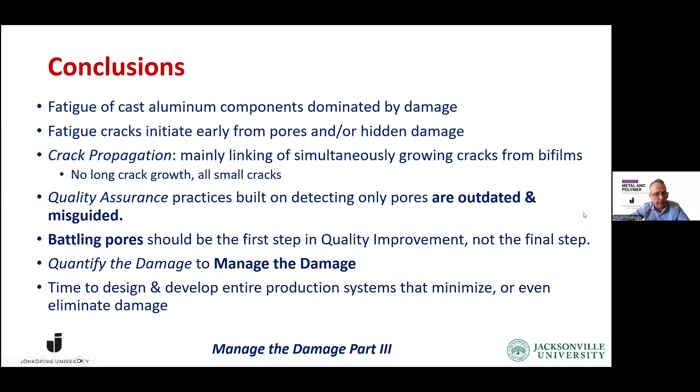And we all think that it's time to design and develop entire production systems that eliminate these melt transfers, that minimize or even eliminate damage. There's a whole lot that the aluminum metal is trying to give us that we've been managing to neglect.